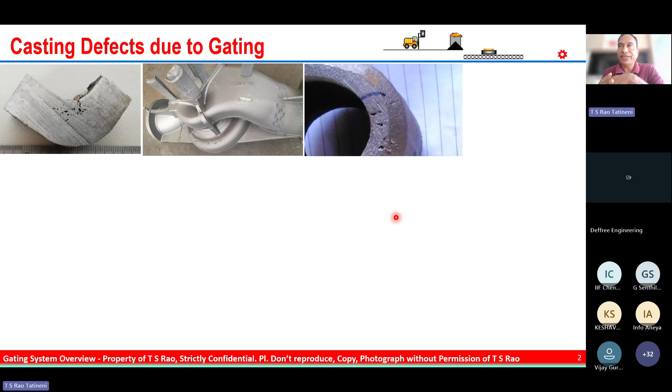We all know that there are various casting defects. We become sick of looking at them in the foundry every day. If the defect is identified during the process, the impact is one. If the defect is identified during dispatch, the impact will be two. If the defect is identified at the customer location, the impact would be ten. Not ten, become a hundred. So it's always advisable to prevent the defect at the source.

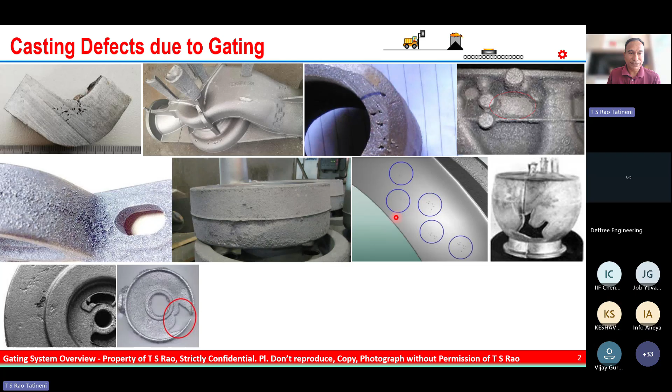You can see the various defects which are caused by the gating systems - shrinkage, misrun, inclusions, scab, and what not. There are hundreds of defects which are caused by the gating system, directly or indirectly, but the gating system is the main source of defects in castings.

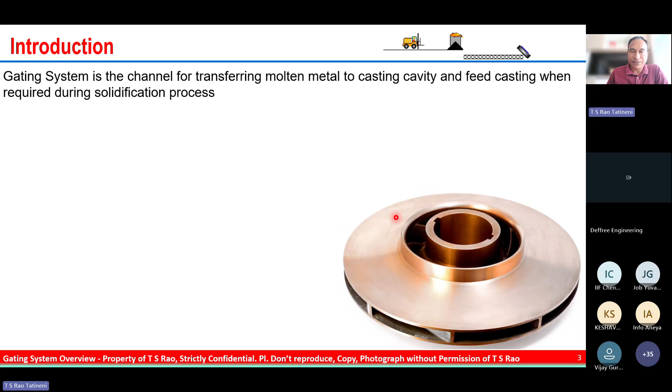Moving to the introduction: we all know the gating system is meant to create a channel for the molten metal to get into the casting cavity without turbulence, ensuring sound casting. The gating system is calculated depending on the material of construction - we should know what material we are going to pour in the foundry - and also depends on the molding process, whether it's green sand, chemically bonded sand molding, or metal mold. It also depends on the quality requirements.

The gating system also depends on the quality requirement we're expecting, with respect to level 1, level 2, level 3, level 4. Looking into the objectives of the gating system, it's expected to fill the mold cavity with the shortest time possible without turbulence, and we need to ensure higher yield every time, with the optimum number of pattern cavities that can be accommodated within the platen size.

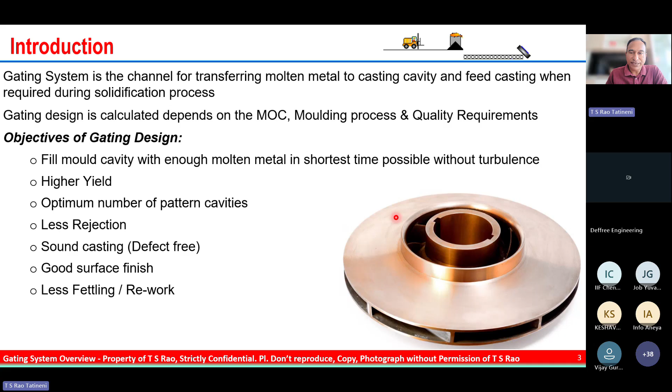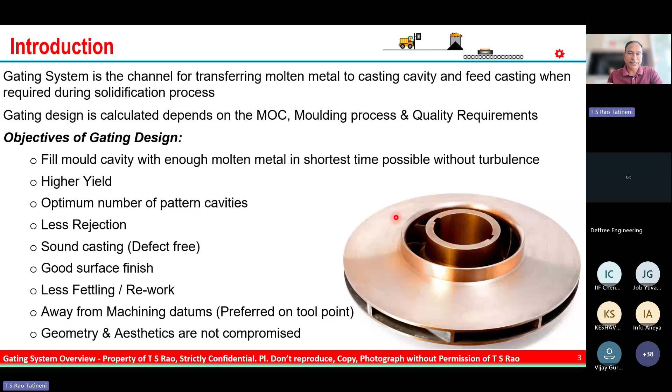We need to ensure that the gating system gives less rejection, and we always need to produce defect-free castings. We need to ensure good surface finish of the product with less fettling or rework. The gates should be away from machining datums, because over grinding or less grinding at the gate can affect the machining datums. It's always recommended to have the gating system on the tool point so it gets removed during machining, so that geometry and aesthetics are not compromised because of the gating system.

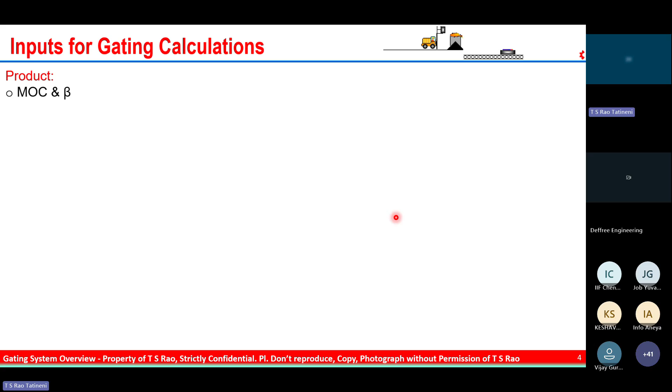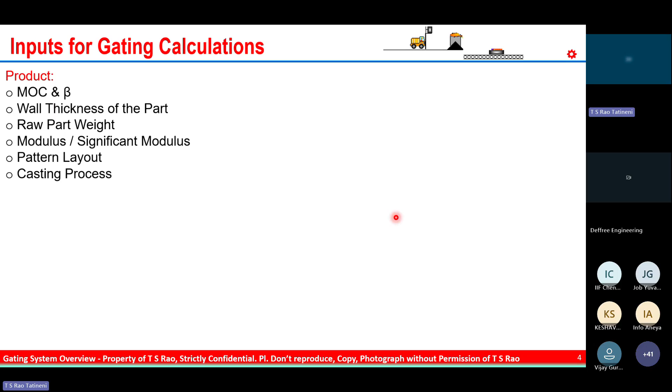In the next slide, what are the various inputs required for calculating the gating system? When you look into the product requirement, we should know the material of construction and the grade of the liquid metal we are going to pour, the wall thickness of the product we are going to manufacture, the weight of the raw part, the modulus of the whole part, and also the significant modulus of the part. We should also know the pattern layout and the casting manufacturing process.

When you come to the casting process, we should know what type of molding casting process we are going to adopt, either sand casting, foam casting, wax based casting, or metal based casting.

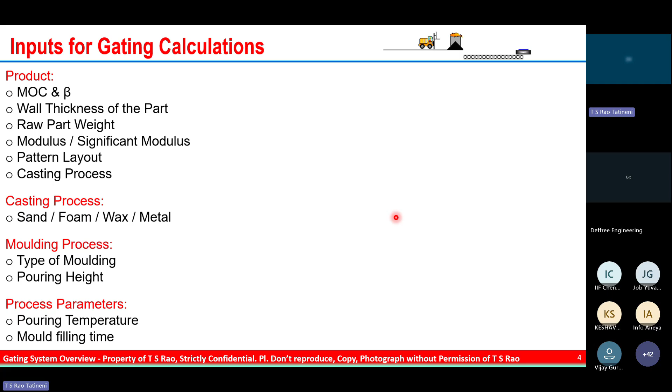Then in the molding process, we should know the type of molding - whether it's horizontal, vertical, or inclined, and the height of pouring. Looking into the process parameters, we should know the pouring temperature and the mold filling time. There are a lot of tables available to calculate the modulus and the significant modulus.

Moving on to the types of gating, there are two types as we know. One is pressurized gating, where the choke is very close to the casting cavity - when the choke is close to the casting cavity, it is called pressurized gating. When the choke is away from the casting, near the down sprue, it is called non-pressurized gating. So the decision to follow pressurized or non-pressurized gating depends on the molding process.

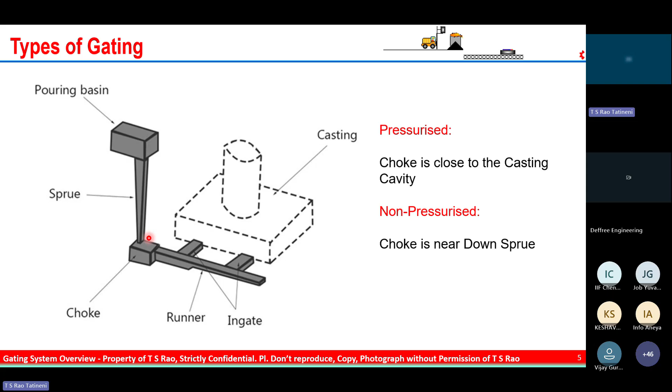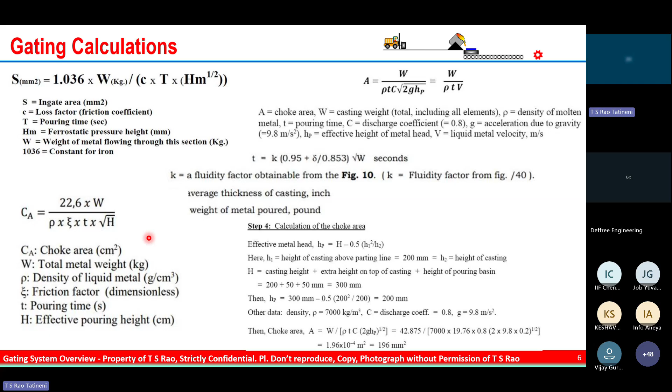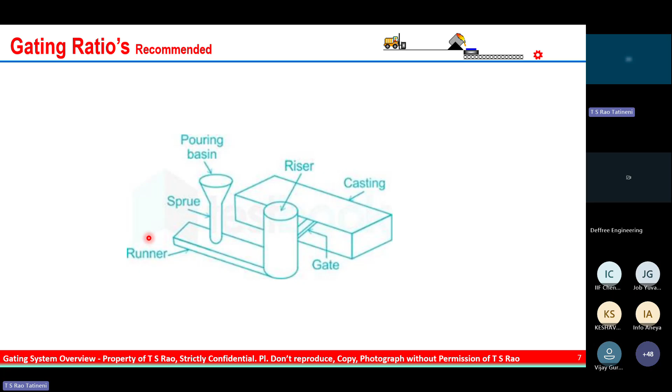There are a number of formulas available for calculating the gating system, but I won't go into more detail because every foundry is unique and needs to follow their own tables for calculating the gatings. This is very important - the gating ratios are very, very important. Whatever formula you use for calculating the in-gate, the gating ratios are very important.

The top table is for the typical ductile iron pressurized gating system - down sprue is to offset is to runner is to in-gate. This is very important. Most foundries ignore the offset, but according to me, the offset is very, very important with respect to producing sound castings. That's why I introduced this offset. Normally they say 3 is to 6 is to 4, but I say 4, 5, 6, 3. This is very important - I'll explain why the offset is important in subsequent slides.

Going to gray iron, for a pressurized gating system, the ratio is 0.9 is to 1 is to 1.3 is to 1. Again, the offset is very important - the offset should be either equal to or a little larger than the in-gate size.

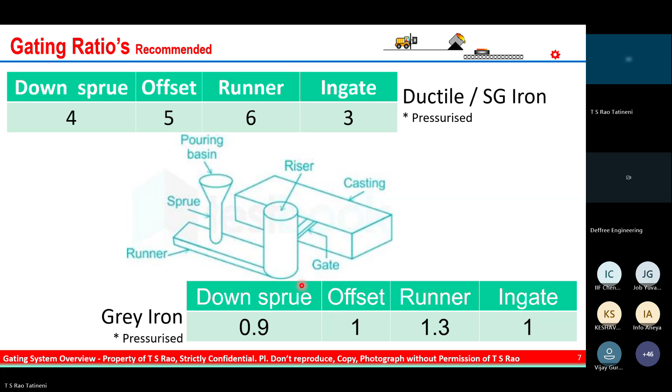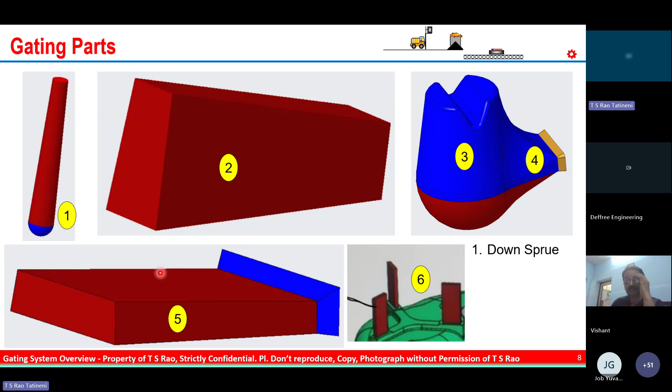The gating parts - as we know, there are many parts used in the gating system. I'll explain them one after another. The first one is the down sprue, where the metal enters the casting cavity. The second is the runner bar - if you see, the runner bar is tapered to ensure we increase the yield. There are calculations for the taper as well.

The third one is a riser - for this instance, we have shown this as a sand riser because of the Williams wedge shape we see here. The fourth one is the riser neck. The fifth one is the in-gate, followed by the chamfer for easy breakage. The sixth one is the flow offs, and the cup as per the process adopted.

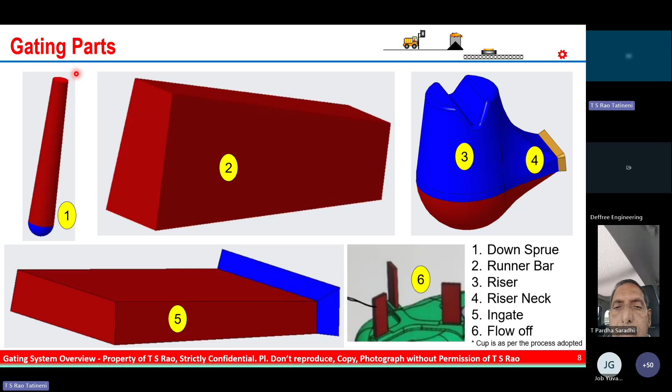I have not shown the cup, but the pouring cup depends on the process adopted - it needs to be customized depending on the foundry process. So how do you select the feeders? There are many feeders in the market - how do you select the feeders?

The first one is a sand riser, where the modulus extension factor (MEF) is 1. The second one is insulating sleeves, where the MEF would be about 1.5. The third one is insulating direct pouring sleeve, here also the MEF is about 1.5.

The fourth one is exothermic sleeve, here the MEF is about 1.67 to 1.71. The fifth one is high density or neck down sleeves, here the MEF would be about 1.75 to 1.8.

And the last one is a chill. The purpose of the chill is to push the hot metal towards the riser so that the riser will feed the required metal at the particular junction. So these are the feeders.

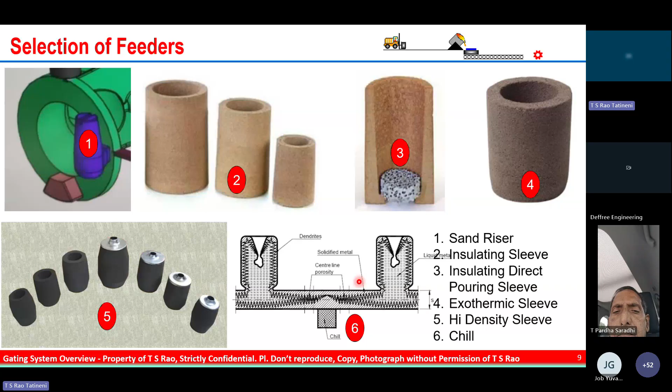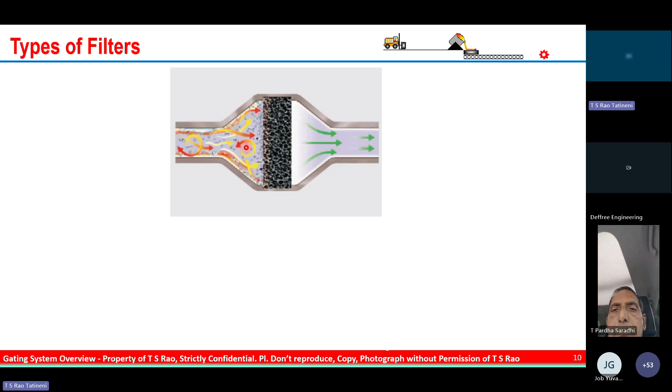The next slide, we talk about the filters. The purpose of the filter is not only to filter the liquid metal, but also to ensure laminar flow. You can see that before reaching the filter there is turbulence, and after the filter there is laminar flow, and all the impurities in the liquid metal get trapped within the filter. When you look at the various filters, we have pressed extruded ceramic filters, and we also have ceramic foam and honeycomb filters.

The next one is fiberglass mesh. Mostly the fiberglass mesh is used when we tap liquid metal from the furnace to the ladle. Then within the mold or above the mold, we use either pressed filters or foam filters. You can see the various shapes of the filter depend on your pouring cup and the filter print. You can use various sizes.

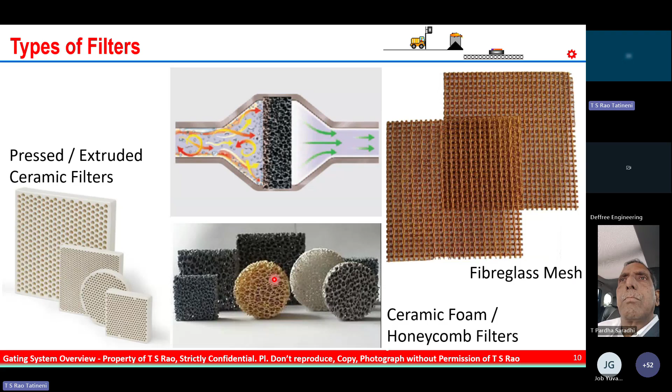Moving on to the next slide is a basic gating design for ductile iron horizontal molding process. Here you can see the pouring cup, which can be customized depending on the foundry process, followed by the down sprue, and there is a cup, called the pouring cup or the well. Next is the filters. In this case, we have two filters on either side of the down sprue.

Next one is the offset. As I said, the offset is very important for the metal flow. Normally when you pour the metal, it goes into the cope half, then comes to the parting line, goes to the drag half, gets filtered, then clean metal travels to the cope half. That's why this offset is very important to ensure there's no turbulence and the metal flows with a laminar flow through the runner bar.

Then followed by runner and the ingates. On the other side, you can see the chill. The chill pushes metal towards the riser where the riser gets fed. Here in this case it is a sand riser, and this riser neck is connected to the casting flange.

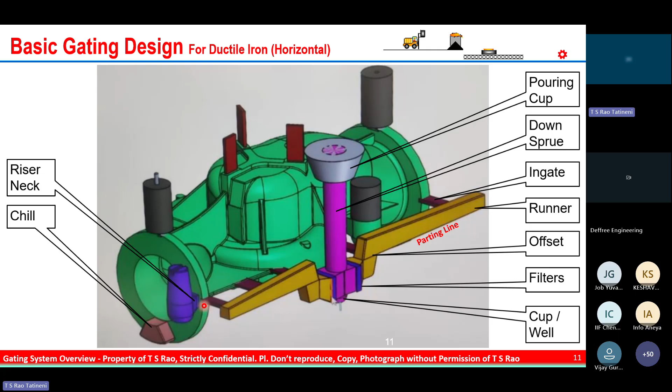These are the exothermic sleeves. You can see the sleeves are connected with a pipe. It gets open through the roof. And we have flow offs.

So there are three purposes for the flow offs. The first purpose is when we pour the hot metal, the gases accumulated within the mold environment are released through the flow offs so that there is no gas entrapment within the mold environment.

The second purpose is that the first metal we pour is likely to carry loose particles within the mold, so the metal mixed with loose sand particles gets out first, then clean metal gets in. The third purpose of the flow off is whenever it requires a little pushback, so the flow off can also feed the casting as required.

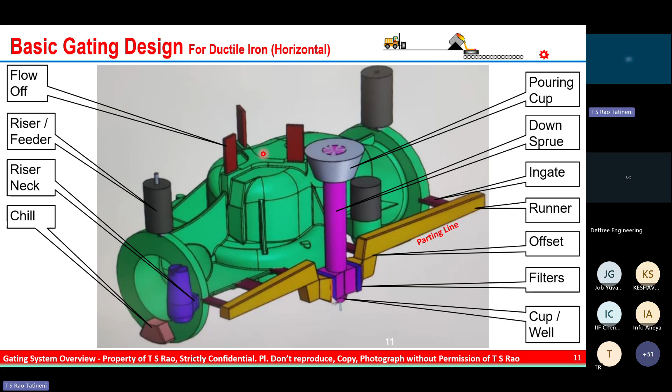With this, this is a very basic gating design for horizontal parting line sand casting. When you see the vertical casting process, it is again vertical green sand molding.

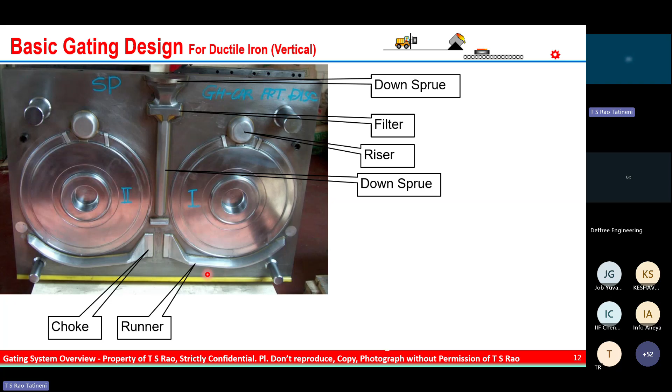Here, instead of cope and drag, we have SP and PP, but the orientation would be different. Here the down sprue is at the top, followed by the filter, and the risers are on top of the casting cavity along with the down sprue. There are chokes here and the runner bar, then followed by the ingates. Normally the ingates are given on other halves.

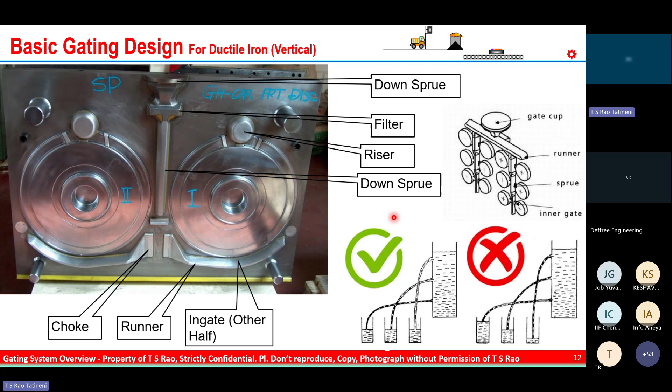Moving on to the next slide for the lost foam technology. Here we have a lot of flexibility with respect to the gating design. There is no hard and fast rule like down sprue has to be here, runner here, ingate here. No, we are at liberty to keep wherever you like to have.

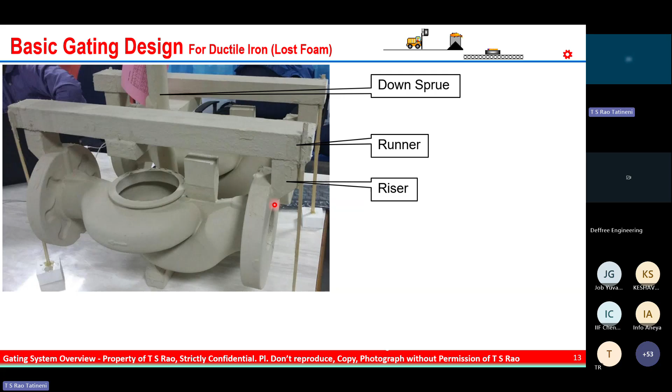In this case, we have down sprue at the center. There are two cavities. We can have runner on top of the casting, followed by the riser or the metal inlet. The beauty of the process is down sprue comes at the bottom, and there is another runner bar at the bottom below both the cavities. Again, we can connect the ingate.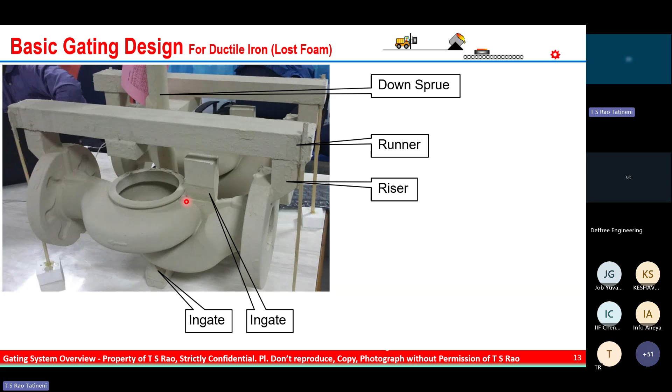Ingates can be connected directly below the runner. We have a lot of flexibilities in the lost foam technology where we can do anything. If you want to extend the runner, give one more ingate here, or if you want to give ingate here, you can give. There are a lot of flexibilities with respect to lost foam gating because of the unique process. These are the beautiful castings produced out of the lost foam casting process.

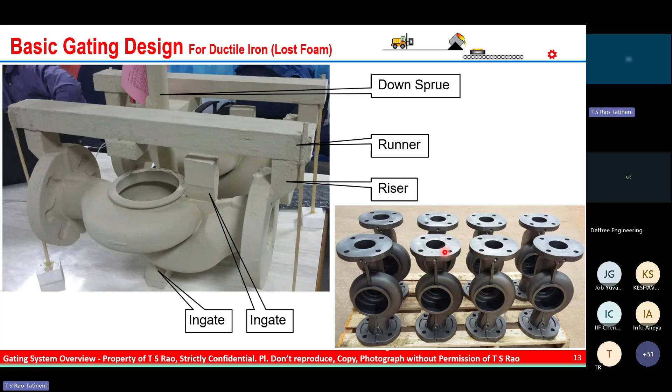The next one is the replicast process. Replicast process is same as the lost wax investment casting process, whereas here, instead of wax, we will be using foam, which is very similar to investment casting process.

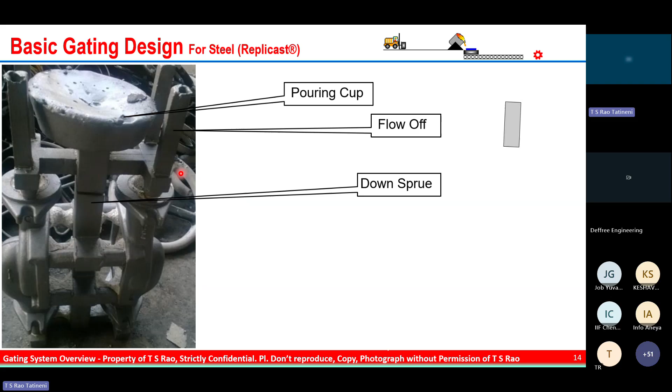Here also we have a lot of flexibilities. We have pouring cup, followed by the large flow-offs, then down sprue, runner bars, ingates. These are beautiful castings produced out of the replicast process.

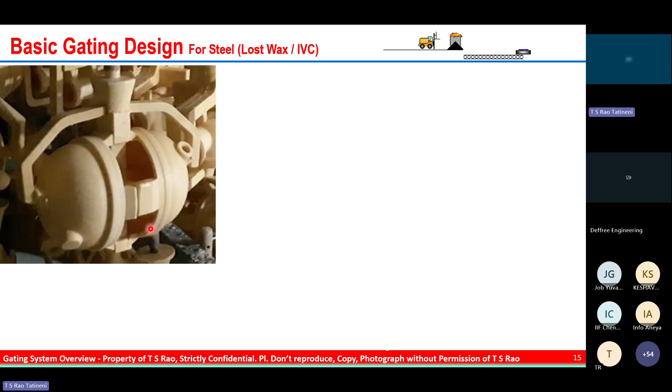Moving on to the next slide, this is for the lost wax or investment casting process for steel parts. Even here we can see a lot of flexibilities. There's a down sprue here, the runner bar here. We can connect one ingate here, one more ingate here. There are connections between the cavities to ensure that they don't deform while pouring.

These are the beautiful castings produced out of the lost wax process.

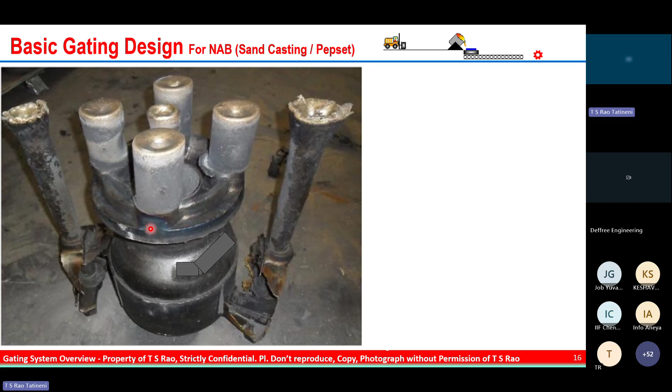This is a nickel aluminum bronze, one of the toughest alloys to manufacture in the foundries. This is sand casting, but this is a pepset three-part molding. Here you can see the pouring cup. There are two cups because of the weight requirement, so two cups are fed at the same time.

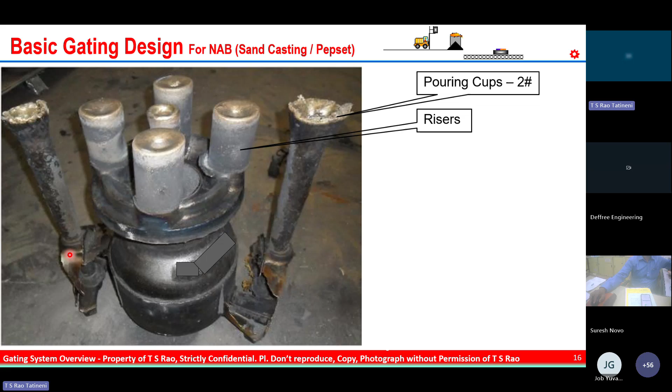There's a couple of risers because the nickel aluminum bronze is a short freezing alloy, so it requires a lot of feeders. There are two down sprues and two filters, one filter here, one filter here, and then the ingates. Always for nickel aluminum bronze, the ingates have to be at the bottommost portion of the casting so that the metal flows upward.

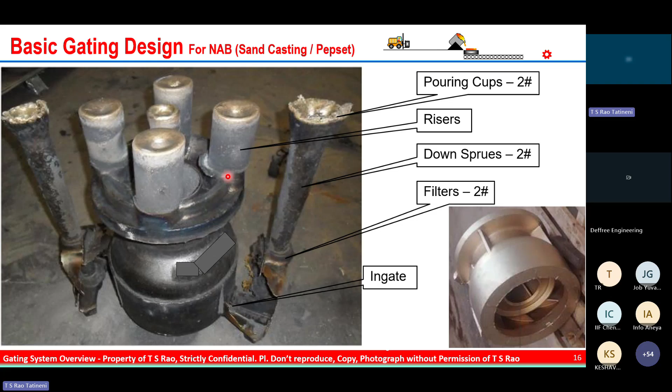It is a beautiful casting produced out of the sand casting process, which is a pepset. Moving on to the next slide.

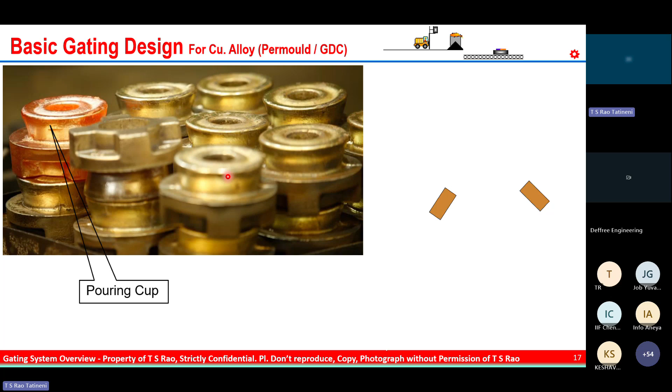These are for the copper alloys, but this is for the Permould, or it is also called the gravity die casting process. Here it is direct - straight on top of the casting we can pour. So this is pretty easy for pouring in GDC.

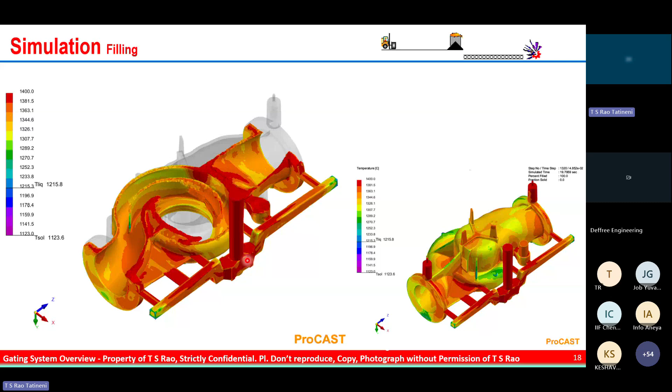When you come to the simulation, the first one is filling. It is always important - we can see that when the metal is pouring through the down sprue, how the metal is flowing. So symmetry is very, very important in the gating design. If you have two cavities, we need to ensure that both cavities are filled at the same time. If it is a vertical molding with three cavities in a row in the vertical direction, all three should be filled in the same direction.

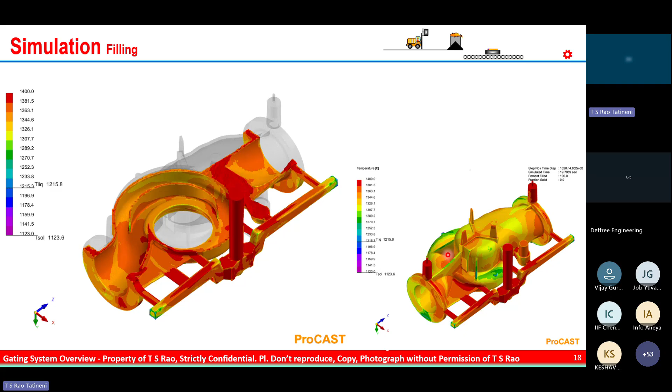So it should be a replica - this is very, very important. The simulation filling pattern will tell us how the casting is being fed, how the metal is going from the down sprue through the runner bars, and then how the casting is being fed. We can see here the cooling mapping on the right. The next slide is on velocity, which is very important with respect to preventing defects.

So is there any question?

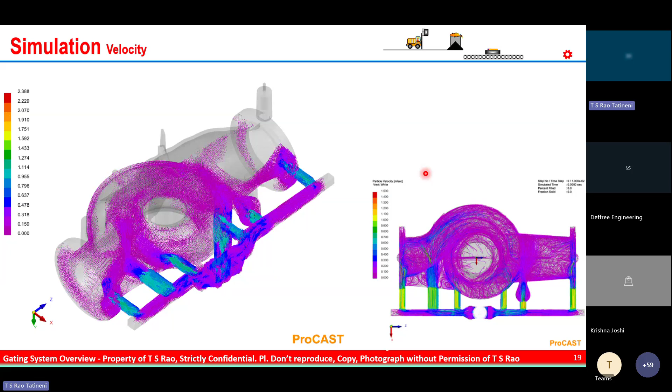The velocity is very important with respect to preventing sand inclusions or any inclusions within the casting environment. Anytime the velocity goes beyond 1, there could be some inclusions within the mold environment. In this case, everything is within 1, so this particular casting will be free from any inclusions. Here you can see the velocity mapping.

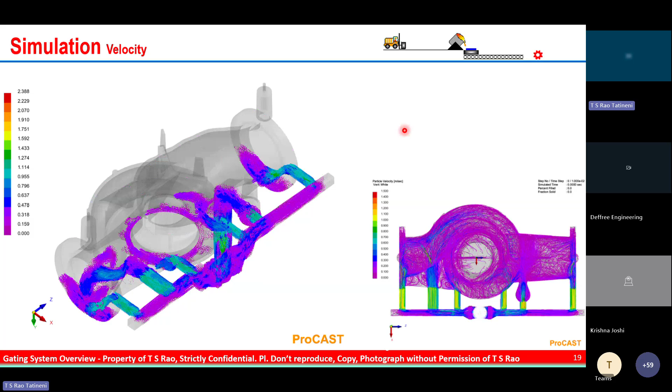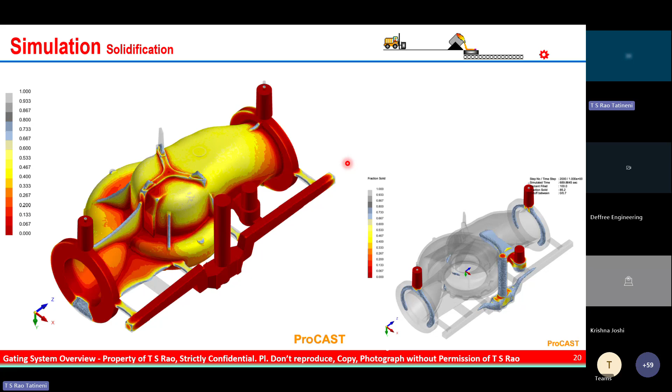The next slide is on solidification. Directional solidification is very important. The last freezing zone should be close to the riser to ensure that the riser is hot till the entire casting is solidified. This solidification pattern shows how the casting is directionally solidified towards the risers, ensuring no hot metal is left without feeding by the respective feeders. The last freezing zone is in the risers. Here you can see how the directional solidification is happening within the mold environment.

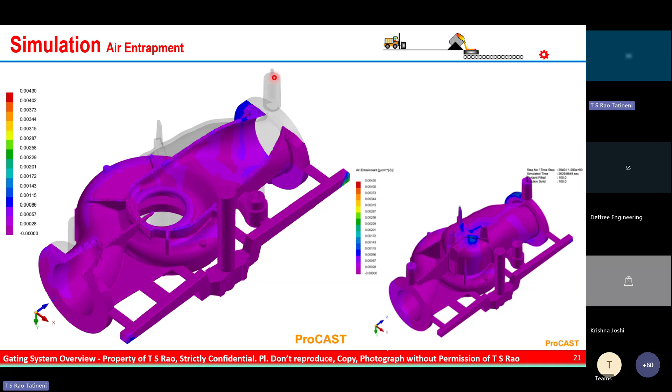The next slide is on air entrapment. This is also very important. When I said the flow-offs are very important, even if you have risers, it is required to have a flow-off through the riser so that the vacuum or air within the mold environment is taken out through the topmost portion of the casting. Here you can see the flow-offs are connected through the risers, on the topmost portion of the pattern. Here you can see if there is any air entrapment, which we can tell by the color coding.

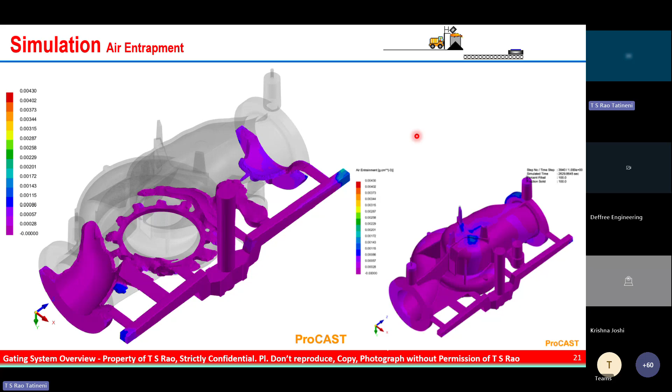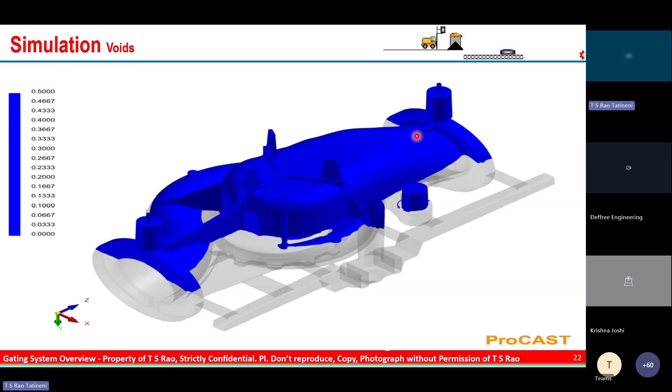The next slide is on voids. Voids also happen because of velocity or air entrapment. Here you can see there are no voids. The hot metal has a laminar flow, getting filled within the mold environment uniformly to ensure there are no voids in the mold.

The next one is the shrinkage process. You can see the shrinkage points coming up when the part is getting solidified. It depends on the quality requirements of the castings. If you look at the geometry at the cut section closely, this casting is well within the color coding of level 2. When it is scaled 1 to 100, for our understanding: if it is within 20, it is level 1; up to 40, level 2; up to 60, level 3; up to 80, level 4; and if it is red hot, it is level 5 shrinkage. When you see the color coding in the cut section, all are within level 2.

So from here, we can find out the shrinkage pattern after the cut section.

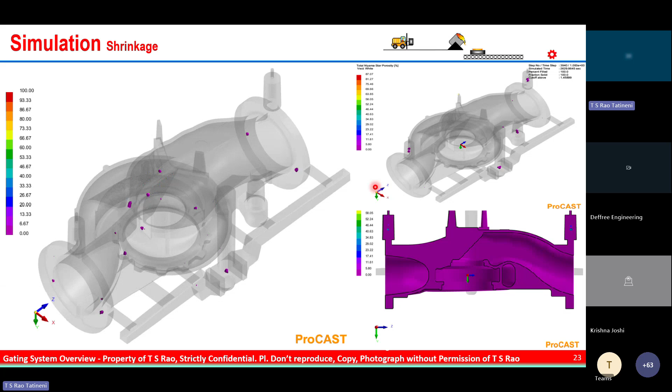These are the beautiful castings produced out of good gating design. For information, all these parts were developed by me in various foundries, with various processes and various materials.

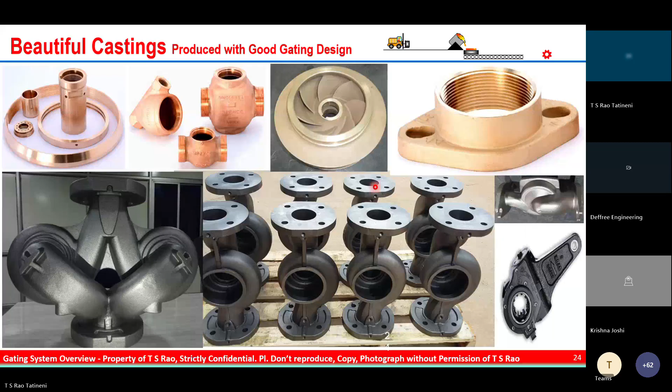I would like to give tips to the new product development team here, because in the foundry, only the new product development team works on the gating design. I know others also contribute, but NPD has a significant role, since I worked in new product development for many years in many foundries.

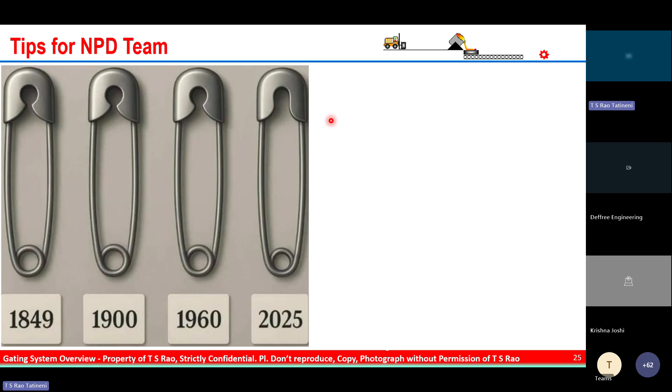If you see the design of the safety pin, when it was first designed in 1849 through 2025, there is no change except a small change made after 1960. No change, because it was designed right the first time and it survived centuries. The gating system also needs to be designed such a way that it survives forever. That is why I am adding these tips for the NPD team, to ensure we survive for centuries.

Always we have to be aggressive in the first instance with an optimum gating design. Any product being developed for the first time, we have to be very aggressive, and always try to achieve the highest possible yield. If we can achieve 80%, 85%, we need to try our best with an aggressive gating design in the first instance. Later, some conventional foundries think, let us produce a sound casting first, and improve later as part of continuous improvement, but it is very hard to implement because of various reasons. The first one is fear of failure.

Suppose if you produce a sound casting without thinking of yield... any question?

When the product is approved, we get scared of correcting the gating system because we are likely to fail. If we fail, the loss is going to be heavy.

Production gets affected during the transition, taking trials again and going back to the original gating design. We need to engage a lot of resources for the trials, get changes again, and risk mix-ups. Parts produced with the previous gating design and the current gating design are likely to get mixed up, causing a big issue later at the customer end.

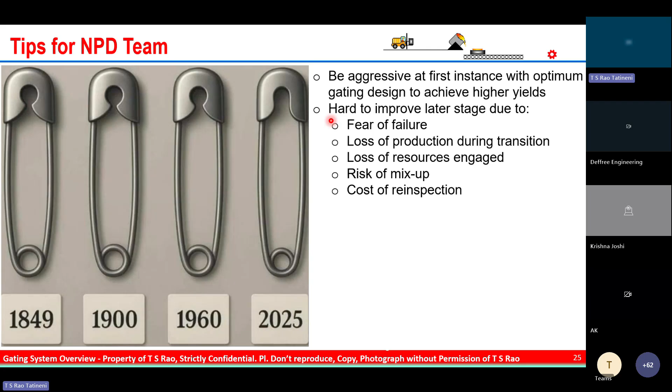Again, there's cost of re-inspection. Any gating change requires validation, like ultrasonic test, radiography test, or MP test, so it costs money with no guarantee we achieve the same results. In my experience, whenever we change the gating for the better, we conduct trials and produce samples, but even if we go back to the previous gating, there's no guarantee we end up with the previous results.

So this is a very unique problem in the foundries. It's not like a machining process where if you change the program, you can simply go back to the respective process. This is one risk specific to foundries.

If you keep altering the gating design, the rigidity and integrity of the tooling get affected because of many changes. Whenever there's a change in the gating system, it's expected to obtain approval from the customer, requiring submission of the PPAP and a lot of documentation work, and production also gets affected during this period.

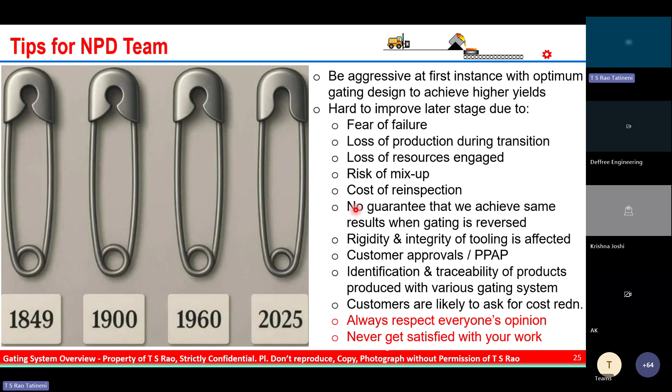For the information of the team, my highest yield is 98.2%, and that is the highest yield I could achieve. Even I am not satisfied. We should never get satisfied with our work. We always have to work for continual improvement continuously, while respecting everyone in the organization.

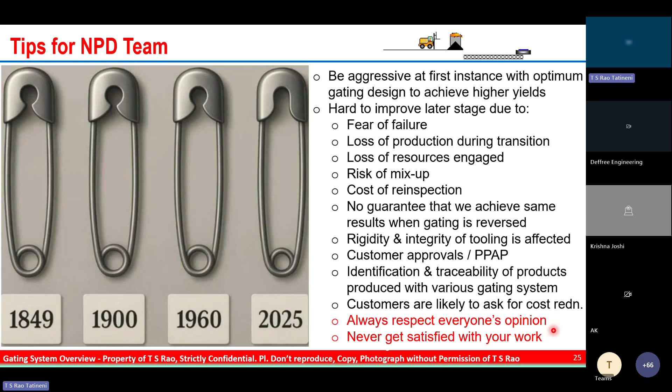We are making somebody's life easy, but that doesn't mean we need to trouble other departments.

With this, I am concluding my presentation. It's because we have some information through the slides, but it doesn't mean that we are the experts. Every foundry is unique. We need to experiment within our given environment.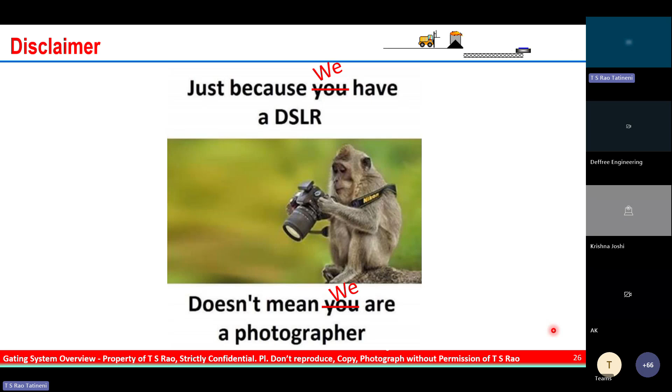Any gating which is very successful in one foundry, if you replace the same tool and move it to another foundry, it is not likely to give the same result because of the various environmental conditions, which lead to different results. With this, let's all together make our nation proud.

In your slide number 7, you mention offset. I didn't understand about offset. Okay, I'll bring this back again, just a second.

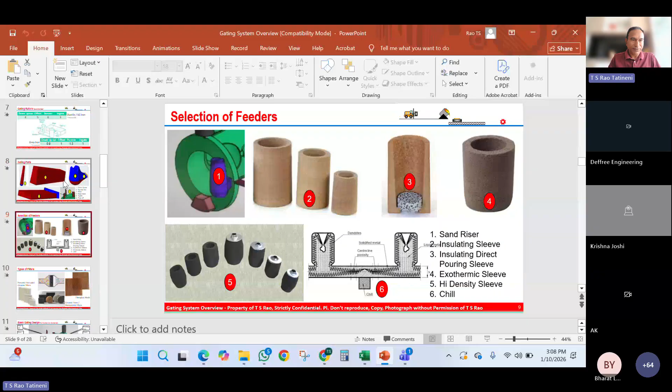Can you see my screen? Though it is in the 7, I will explain the purpose of the offset here. This offset is very important. When the metal is poured in the top half, it goes to the parting line through the drag half. There is also a filter. In fact, this is my own gating system design. With a lot of experiments, I have frozen this for the horizontal line. So this offset is important where the metal is expected to pass from the drag to the cope.

This is always recommended. The area of the offset should be little over the down sprue, both together, so that it should not create a turbulence here because of the sharp edges. That's why the offset is always important.

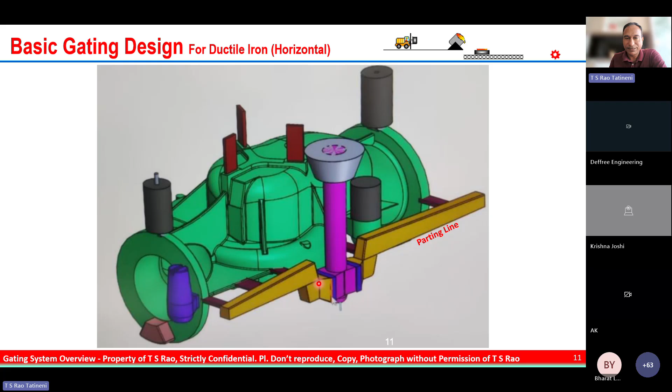Now when you go back to the previous slide, just a second. Here you asked about the offset, right? If you see, the offset is little over the down sprue. Down sprue 0.9, offset should be 1, yes, for the gray iron. For the ductile iron, if the down sprue is 4, offset should be 5.

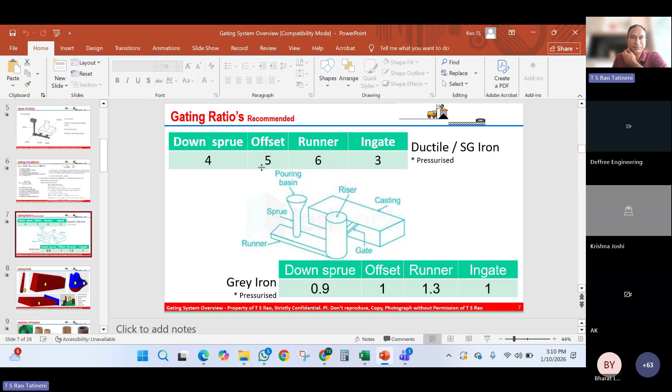Excuse me, I'm a Foundryman from Shantigate. Yes, please. Actually, how much velocity we can maintain at aluminum bronze castings?

For any casting process, the velocity is one. That's what I said. So velocity one always ensures there is no turbulence within the mold environment.

Because why I'm asking, it is more prone to oxidation during filling, so we faced a lot of pinholes after machining. That's why I'm asking whether we can maintain one or below that.

There is no direct relation between pinholes and the velocity. Pinholes can happen because of various reasons - if any moisture is in the environment within the mold, or if the metal is gaseous, then we are likely to end up with pinholes. So there is no direct relation between velocity and pinholes.

Thank you, sir. Okay, Rao sir, one more question. Bharat here. Yes, Bharat.

Related to high density sleeve, you said in your slide, one more slide, you showed that we can provide a vent on the top of the sleeve. So if I'm using a high density sleeve, how can I provide a vent there?